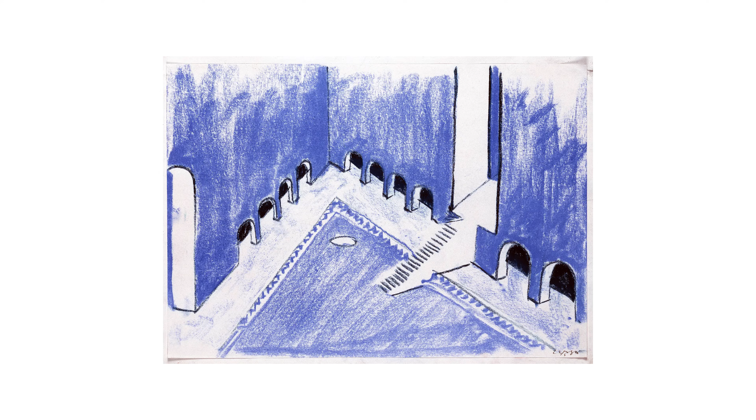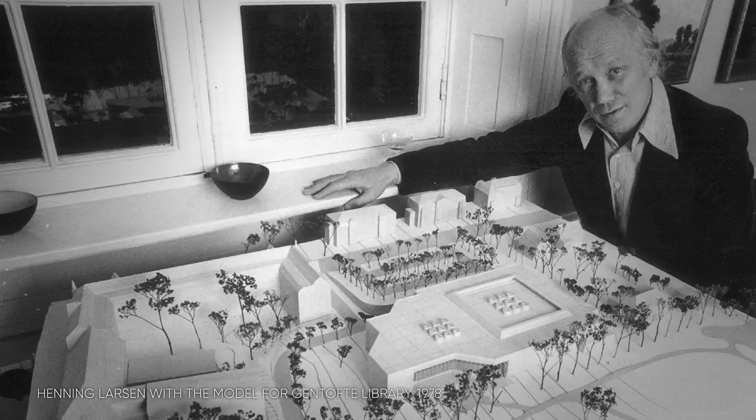So the practice started in '59. It was Professor Henning Larsen who started the practice. But in '79, the studio did the competition for the Ministry of Foreign Affairs in Saudi Arabia and won that competition, and that became the big breaking point for what's happening here. And I started in '89, and at that time the studio just completed and finished the Saudi Arabian project, but also a number of other projects internationally. So it was really, at the time, maybe the only really international studio besides Jørn Utzon here.

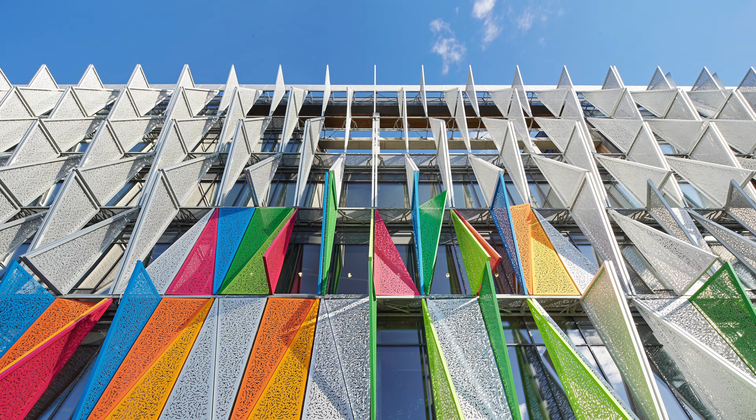Already before Henning Larsen passed away, while he was still active in the studio, we started a journey of moving into sustainability more deliberately and also in depth. We started with energy consumption in buildings, which is a big topic in Denmark because the cost of it is very high, since it's much colder here than in the south. And that journey had already started.

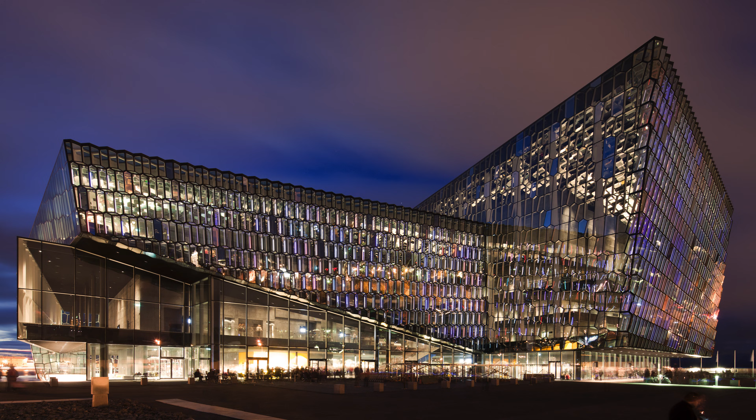Henning Larsen, you could say, was doing a transition of the studio to a group of partners over some years before. So when he passed away, it was not like we lost our father per se, but he was a very important person. At the time, we had the keys to the car, so to speak. His vision of what an architectural studio should be, what this is about, what the whole profession is about, is still very strong and very much alive.

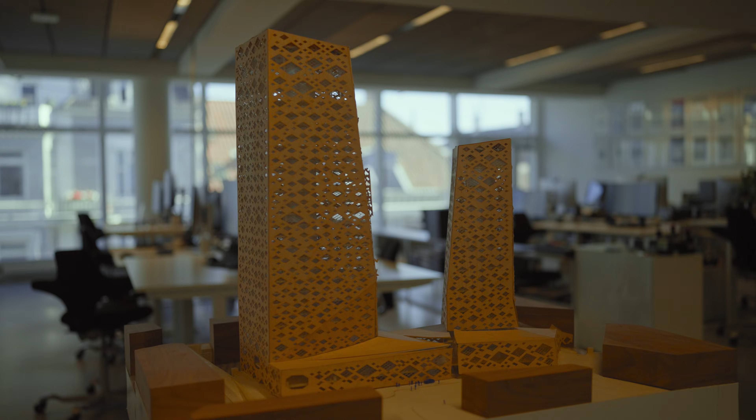We never, ever repeated ourselves. We had clients calling us, saying, I would like a building like the one we have seen. And we said, sorry, we don't do that. We never do two buildings alike. So the curiosity and the openness and the invitation to younger generations to come in and be part of, let's say, coloring or looking at the future is something that's been everlasting in our legacy. Hopefully this is still happening here.

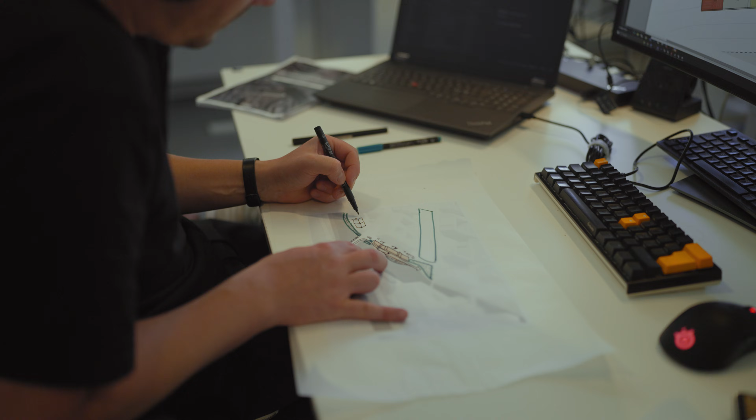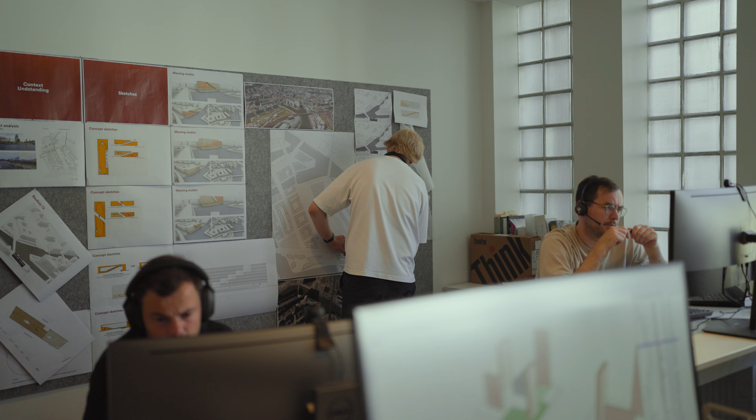I think it is. If you look at our staff and the good architects and colleagues, the average age is something around 30. So we have quite a young, big group of people doing it. And I think for us, part of being curious is also that you are young and want to learn and stuff like that. But of course, in combination with more experienced people.

In Henning Larsen, the context, the place, is the whole driver of what we do. In a technical perspective, in a climate perspective, in a people perspective, and society perspective. That's the foundation, so we use a lot of time in each project to do a deep dive survey of what we're trying to work with.

The learnings from Bolzano and the inspiration of Bolzano was very much to understand this doubleness between the Italian part and the German part, the industrial part, the old part of Bolzano. The Quartiere Ponte Roma project is located in Bolzano, surrounded by beautiful Italian Alps in a beautiful city.

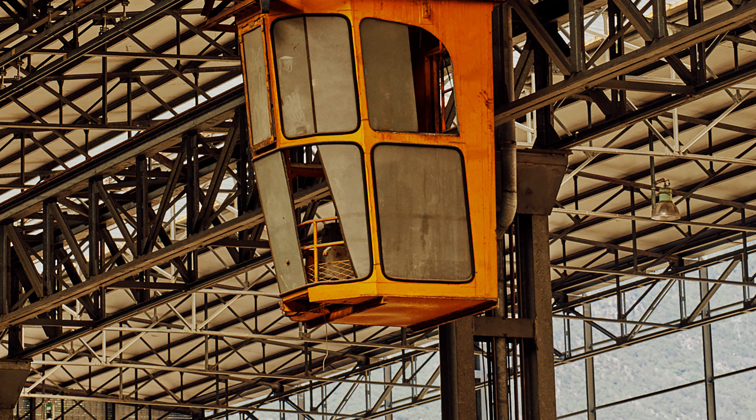When we first came to the area, as always when you're coming to those former industrial sites, you just fell in love with the scale of that and the kind of monumentality. When you start to dive in and read about the history, you also feel that those buildings are there, and of course you want to keep them for many reasons. The first one is the memory and the kind of nostalgia. It's also the CO2 footprint. And also the third one, purely architectural aesthetics - we like those structures.

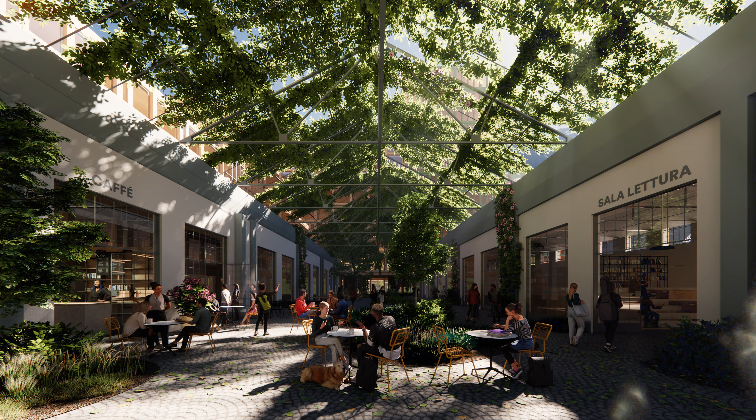What we really tried to do was to not completely erase this authenticity of the site, where you see industry and machines and it's a little bit dirty, but rather maintain it as much as we could and really embody it in the design. But at the same time bring some of the DNA of the Bolzano city center that people love so much. And because the structures are already there, they're easy to activate, and the state of the two ones that we kept was really good. We put them at the focus and the central pivotal point of the whole master plan, relating with the public space as well and using them as a public space.

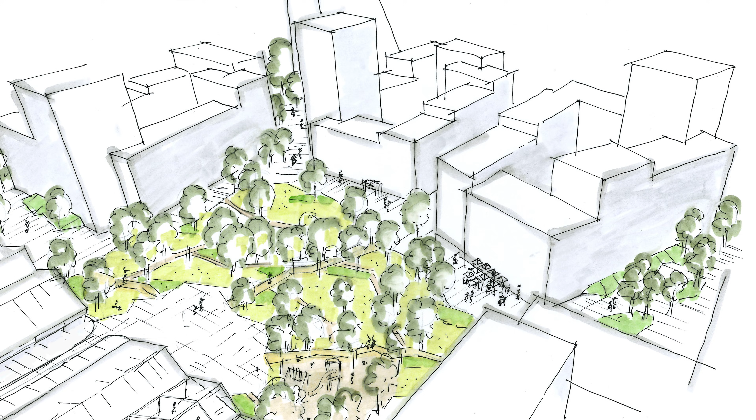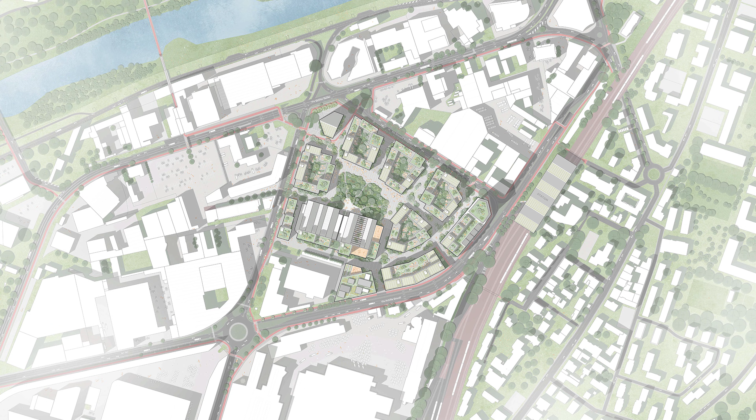The first thing we did when we looked at the site and saw there were 7 existing industries was to really scan and understand what could be valuable in these halls and what could be maintained. Two of the halls we found had a lot of charm and poetry, and they're the most ancient of the site. They're quite special because they're exactly identical and almost kissing each other, so we were calling them kissing halls for the whole design project.

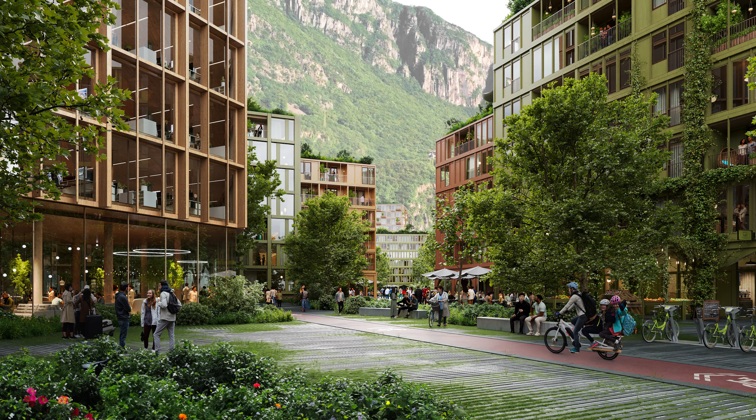But also, what to do with the other 5 halls that we cannot maintain? This was on a smaller scale, so we looked at their architectural elements and tried to figure out how we could reuse them in other ways. For example, some steel beams were used in the roofs of some of our buildings to create greenhouses.

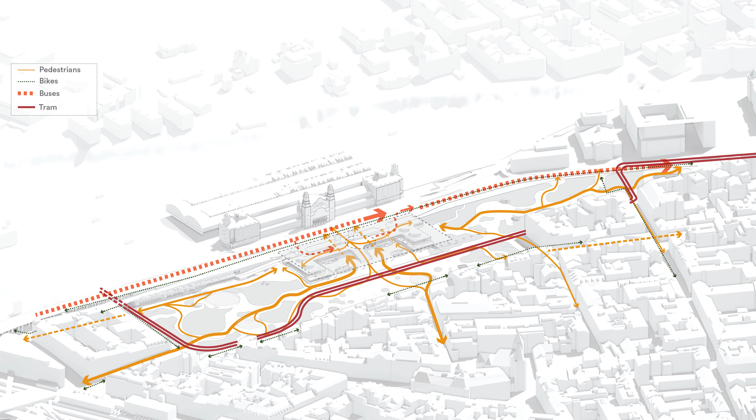When we started working on the Prague Central Station, that was an interesting way of thinking, because you have this hub that connects not just a train, it's a train station, but it's a true gateway to the city. You have buses, trams, soft mobility, cars, where all people are arriving. So the whole concept was about how to make an easy and understandable interweaving of all those ways of mobility.

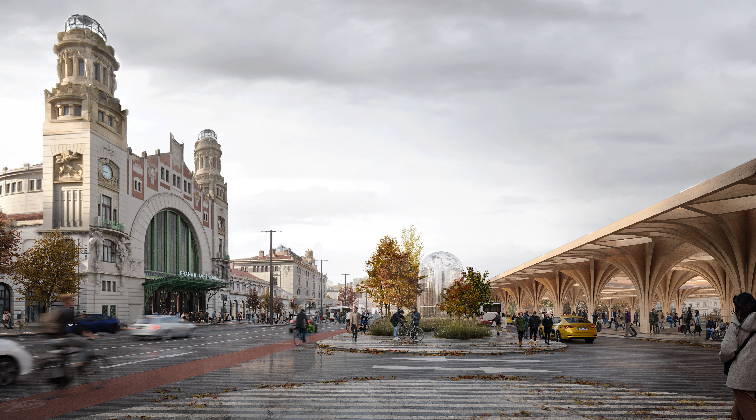We planned for a positive impact on the everyday life of people by developing three strategies. We focused on safety, mobility, and heritage according to that site. We've been looking into making this a safe place for people during the day and during night. Our landscape team worked in the park, creating visibility and sight lines throughout the park, and we also integrated a light concept.

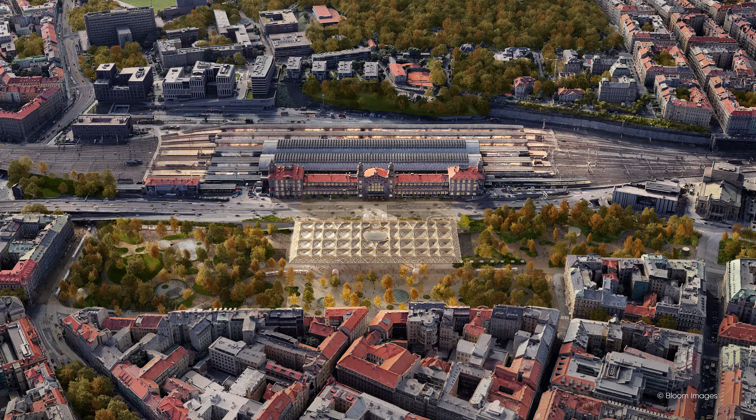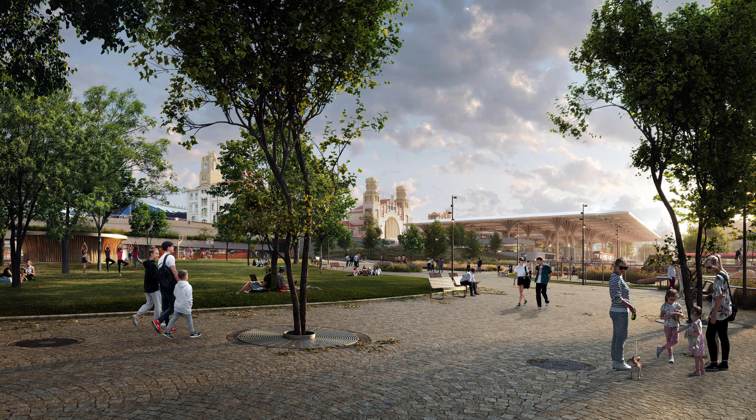When it came to working with heritage, we had a big emphasis on trying to keep as much as we could of the existing park and terminal hall, but still transforming it into a future-oriented mobility hub where there comes a fast train, a new metro, and a new tram line. We also worked with a new layer, like a new canopy reaching out into the park, which was inspired by the treetops of the park itself, to make a holistic proposal.

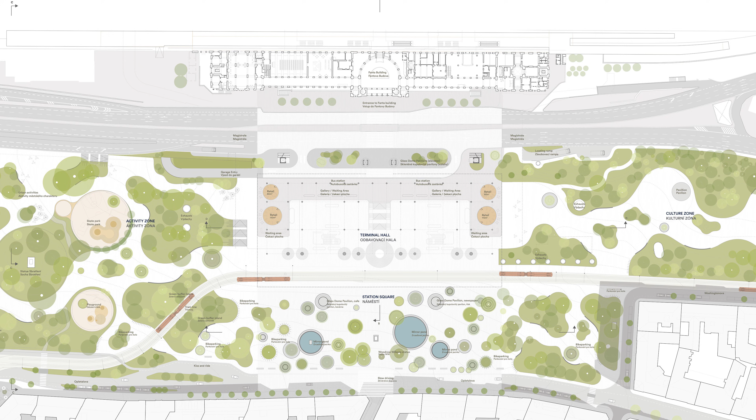The way we work in the office is to understand not just the urban scale or just architectural or just landscape, but we try to work across those three subjects. This project is an interesting example of all three things coming together and informing each other—the landscape is informed by the design of the train station and vice versa. How we think about urban fabric is also even larger: how you enter into the city, what is your experience arriving, and what message you want to give to people coming into the town and when they're leaving it.

For the last years, we've been obsessed with the carbon footprint of each material, which is the big thing. But also that we are using genuine materials. So when we use wood, we try to use it as wood, not as something else, not wood made in plastic or wood that's painted. Personally, I'm so obsessed with this that there's a longevity in quality. If you really do quality, it lasts for many, many years.

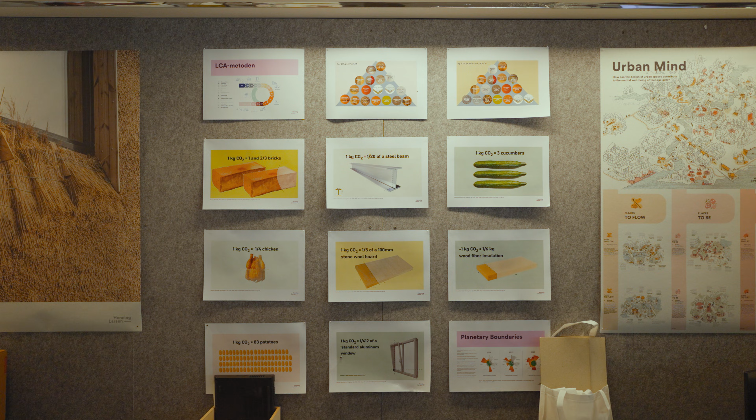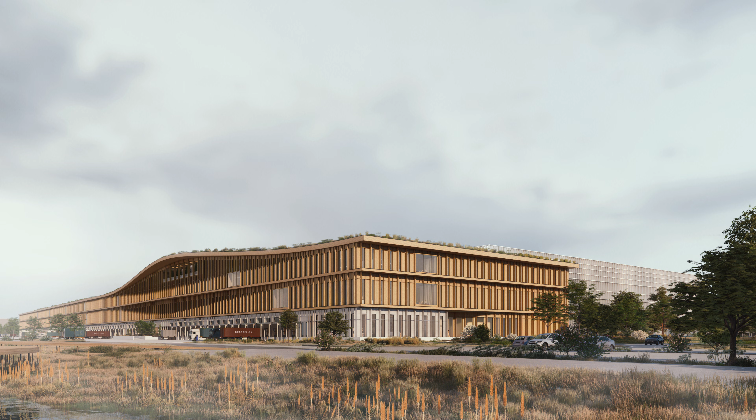Trying to look at the carbon first. How can we bring it down? Where can we get it to? If you look at some of the things we have in the studio now, with the walls of hay, that was a small test project we did in Jutland, 200 kilometers from Copenhagen. 250 square meters, very small, not a significant project. That project has now generated an enormous project in Holland, more than 100,000 square meters of transport hub, a logistics center basically, building the walls in straw. And that is to really bring down the carbon footprint.

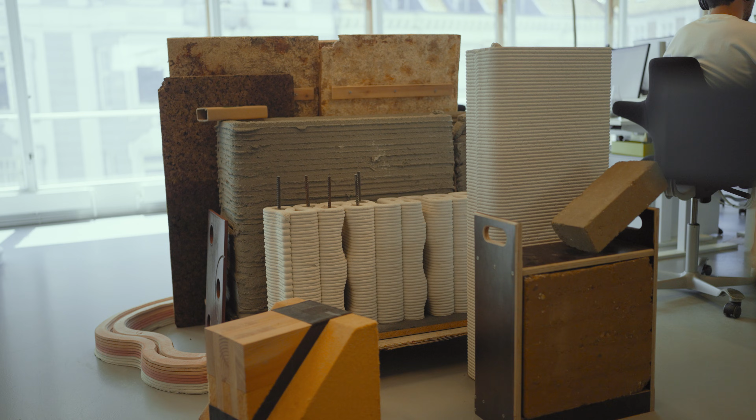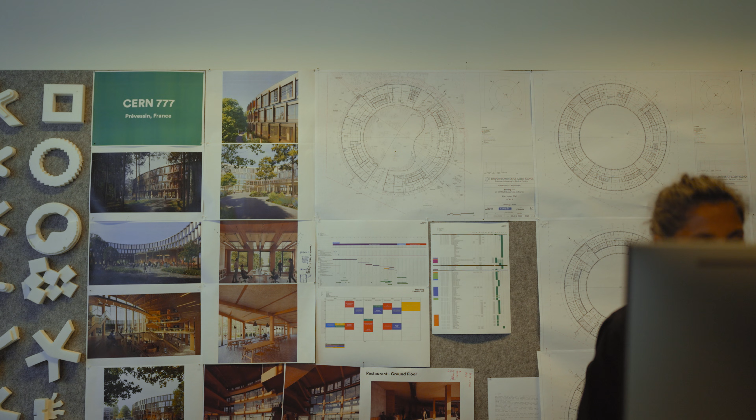So concerning the CERN building, we're following up on our obsession to do wooden buildings. We were very lucky to be invited to an international competition. There were actually 20 competitors, which is a lot. Of course, you need to find the right concept. At CERN everything is about circles, and it's evident you can do a concept which is circular, of course. And we did, and we won.

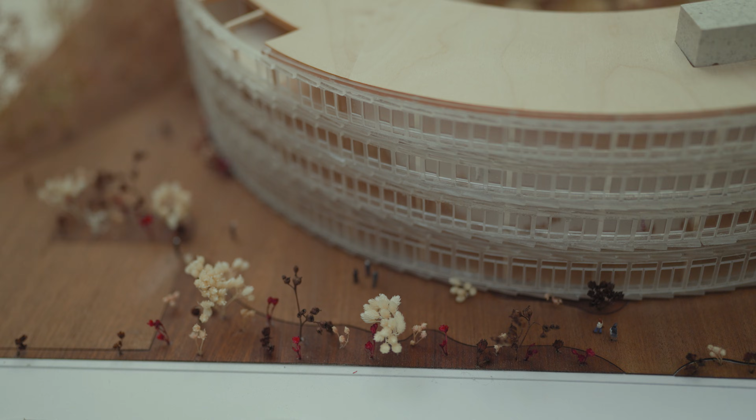What's interesting about the building is that it's taking a step even further towards the perfect wooden structure and the perfect low carbon structure, because it's a big game to find the right balance between materials and structure.

It's a building where we've gone all the way with a full wood building, everything in wood - all slabs, columns and facades, everything is wood. That was a strong focus when we did it, but also inspired by the wood cabins in Switzerland, in the mountains. So it wasn't something far off, we didn't look at the Nordics, it was really a Swiss character.

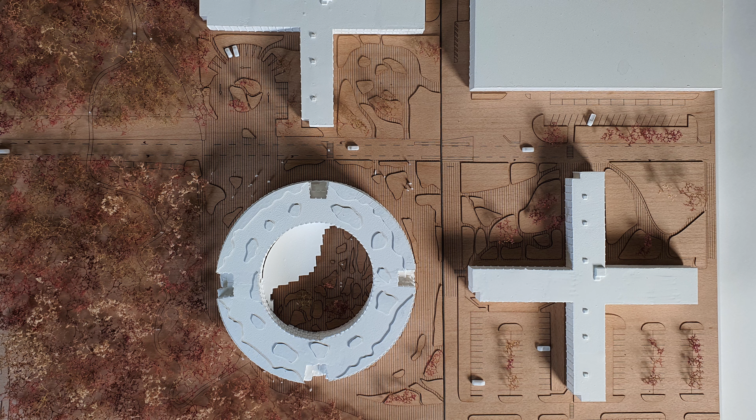So it's basically like a donut with a lot of small office spaces. There's a lot of researchers that need their little space, all of them. 3 floors of office and a lower floor with a restaurant and some kind of labs also.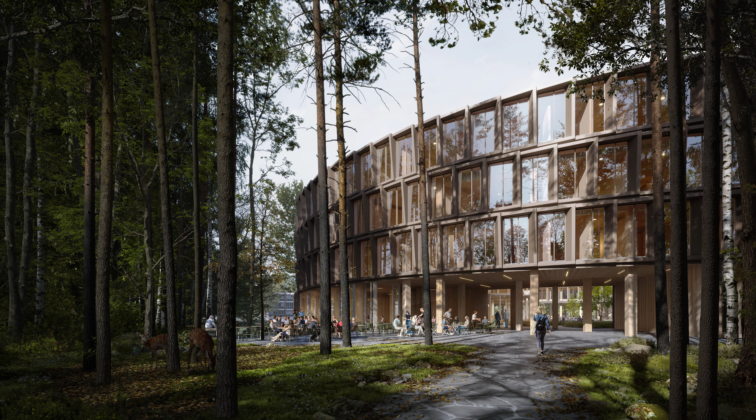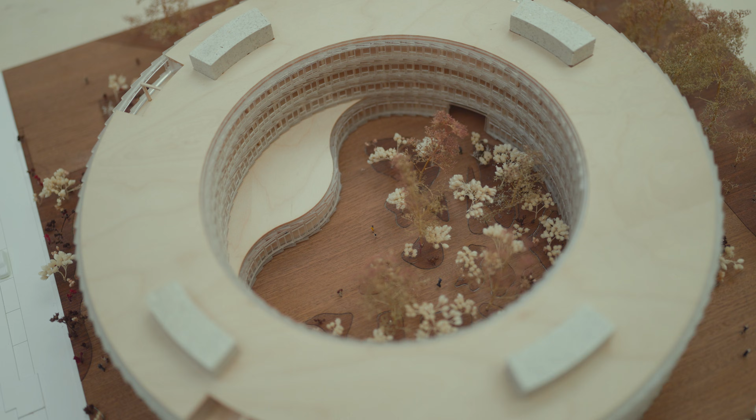At CERN, we were extremely fascinated by Geneva, the Alps, the lake - it's beautiful down there. So the biophilic approach, taking in and making nature part of the building, having a complementary thinking about building, culture and nature - that's the basis of CERN. So the building is part of the site, part of the nature, part of the mountains, and it's also a passage you go through into the courtyard, which is protected, full of trees, with rocks from the Alps in the courtyard. So it's very much about a kind of metamorphosis between nature and building.

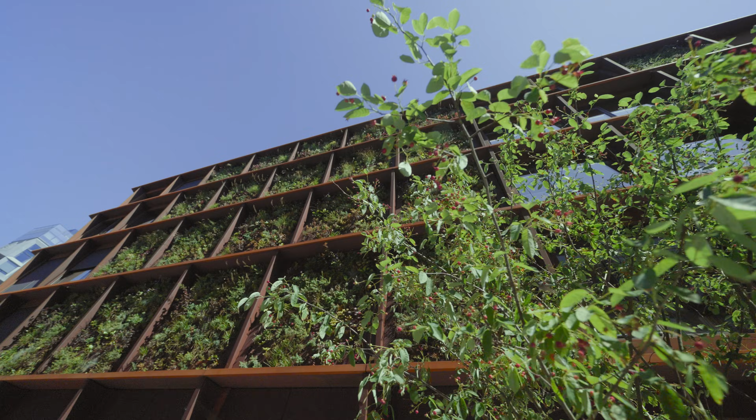This is the green facade. This one is about how we could cover as much as possible of this facade for the residential living here and then have something nice to look at - everything you see from your bedroom and stuff like that, this is the green wall. And we got subsidized by the government because this is the first time it's a self-watering system, so there's no artificial water. Not like our balconies where we water every day - this is not like that.

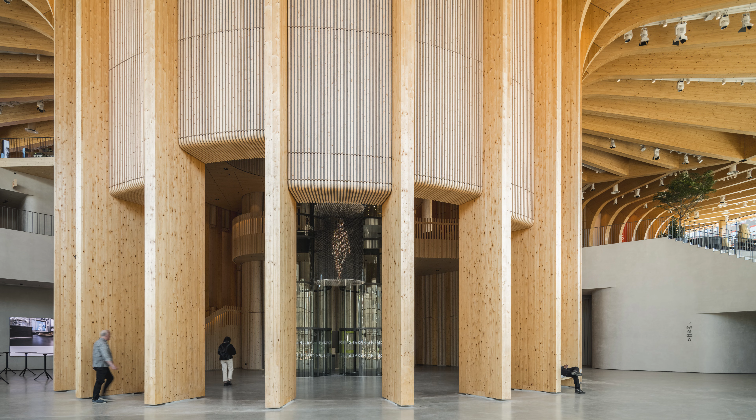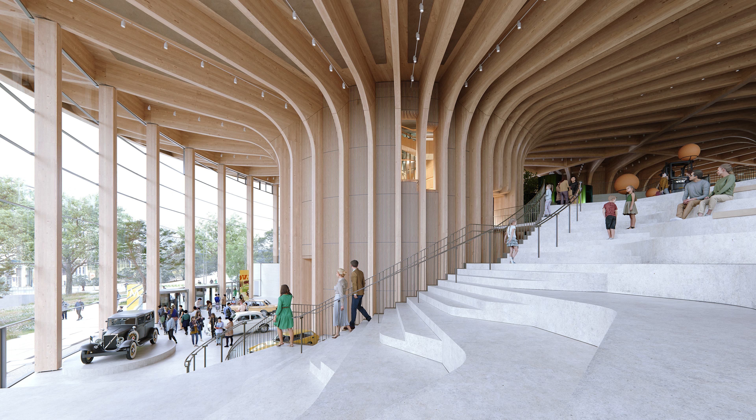Volvo was an incredible experience for us. We were trying to search for the very special thing about Sweden, about Volvo. When we did the competition, we had a long discussion about what is a Volvo and what is a Fiat, what is a Ferrari. Volvo is about two things only - it's about safety and it's about access to nature. That's the two things Volvo does. So we saw the possibility of speaking to the brand in a human-centric way of thinking, securing human beings and taking care.

For this building there would be 4 keywords: the icon, the meeting place, the premium experience - which comes from the car experience - and then the most sustainable building or expression.

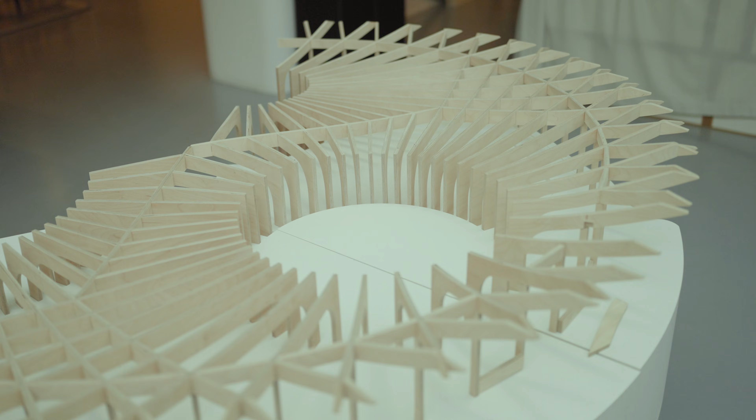So when we looked at it, we said, okay, how can we somehow represent this in a building? In a way the wood structure we ended up with, and also the round shape, was about this idea of being out in nature, looking up at these big trees and being protected by the crown of the tree. The safety is about that. So the wood came from this inspiration.

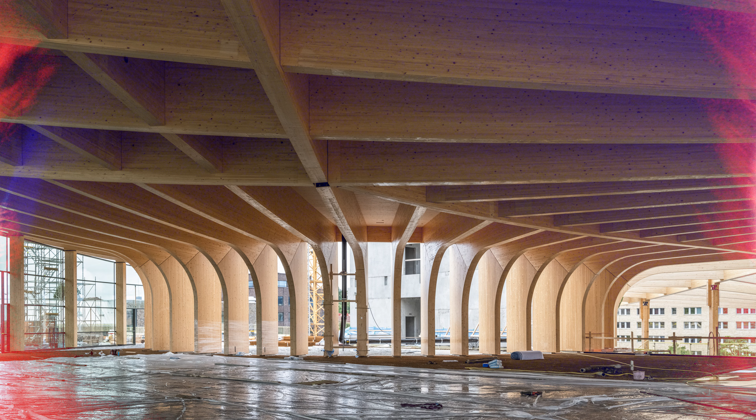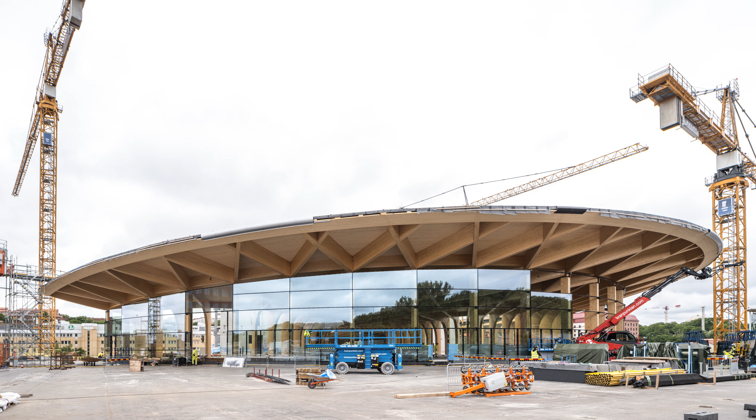It was important that this was a meeting place for the city. There we kind of had this idea of re-establishing a piece of nature inside the city.

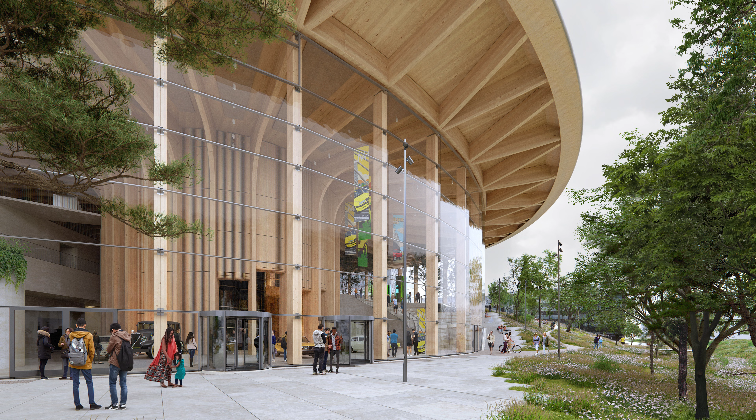We need to accommodate a lot of parkings, 800 I think. We took a little piece from Sweden and put it on top of the parking, so in this urban area we have a kind of big hill. That means you have a slanted landscape, it's a terraced landscape, a cascade.

On which different things happen. In that podium, you could call it, you've got all kinds of secondary functions. There's also the vehicle handover, there's a kind of event hall. Everything is kind of in the mountains, as we call it.

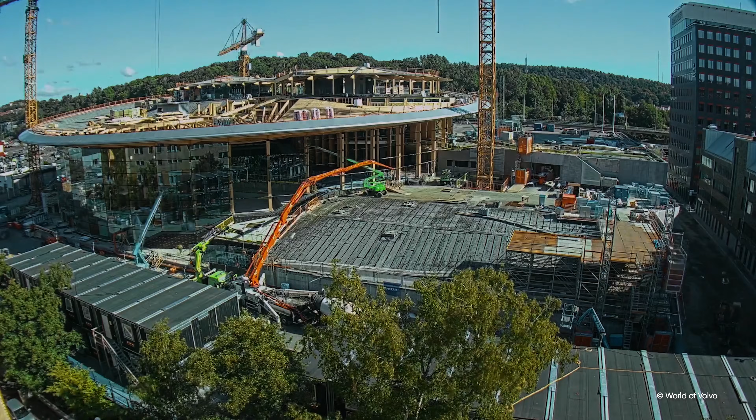And over that, or on that, you have the forest. The forest consists of three bigger trunks in wood. And from the three trunks, a wooden structure is woven into this bigger canopy in a big parametric game, which of course is extremely complicated.

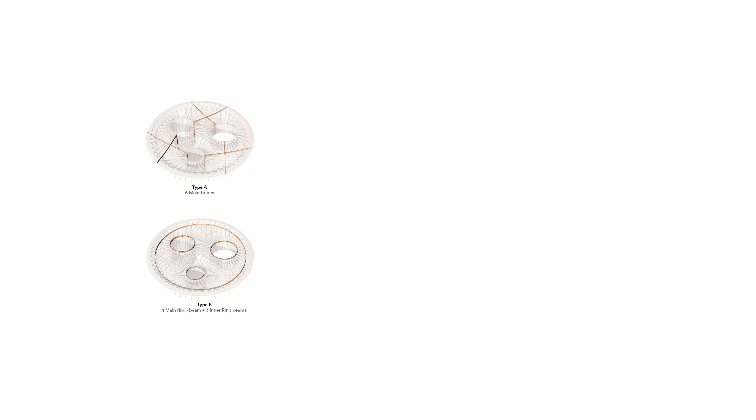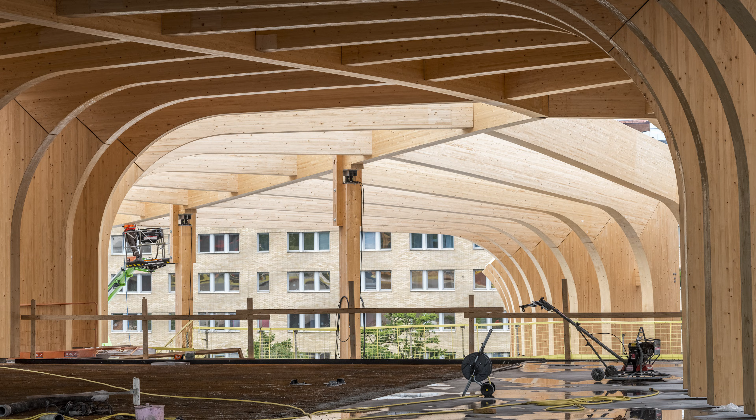If we didn't have the facilities with computerized design and computerized manufacturing, it would be nearly impossible to do. So a lot of different pieces need to be produced, numbered, and assembled. That was an amazing thing to see assembled, because this happened really, really fast.

For Copenhagen, it's the whole thing about - and unfortunately there's not enough international architects here - but the international atmosphere and this building up is that there was strong economic growth here, and the city also changed from just being the place you went to work and then went to the suburbs, to really living here. And then this plan of this area was made by COBE.

There was this strong wish to bring people to the water, which was again a political thing. 20 years ago, if you were swimming in the harbor, it was the direct way to the hospital because it was so polluted. But there was a decision taken politically saying we will be able to swim in our harbor, and it took 7 years to clean it.

And after that, you've been able to swim. And this is our most popular asset in Denmark at the moment.

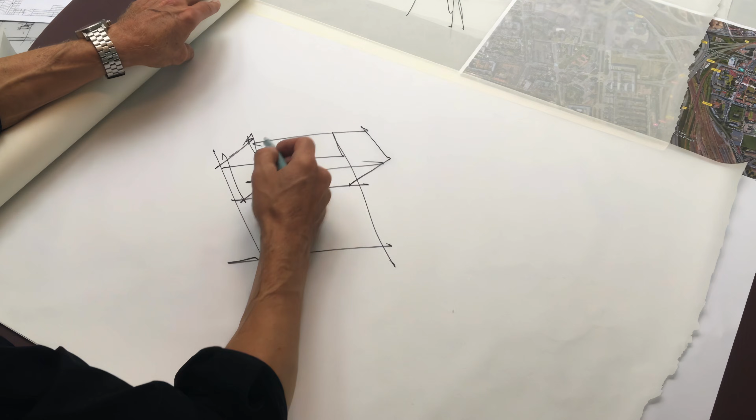And also having cut-out courtyards with terraces, with lushness and green, securing the best possible workspace for people in the building, being close to a terrace, being close to the green, and being really part of nature.

We have 266 trees on the building. We have 180 trees on the roof. We have put off extra facades to be shaded for the wind. And we have a lot of biodiversity in it - a lot of bees and birds and things that normally would not have a chance in this environment.

The overall geometry of the Biotope is breaking the linearity, the traditional linearity of the office building. The Biotope is part of Euralille, where a lot of new buildings were built in the 90s.

We needed to break down the traditional way of making workspace. The site is kind of a rectangle. We cut into this block and have a zigzag, you could also say a yin-yang - the idea that you meander the green and the building together.

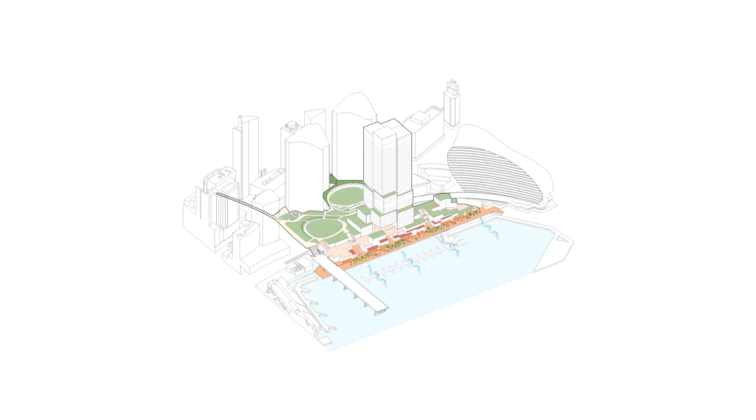The sketch was to say we'll do a very efficient machine for the tower, but we'll do that quite fast. And all the time we will spend on finding out how to connect to Sydney, to connect to the scale of the old harbour. The CBD, which is the business district, the centre of Sydney, is very mineral in its character. There's hardly any green. So could we introduce a park? Could we have places where you meet?

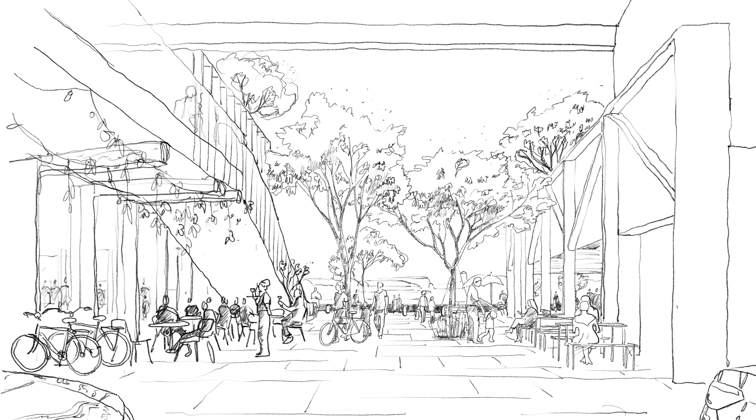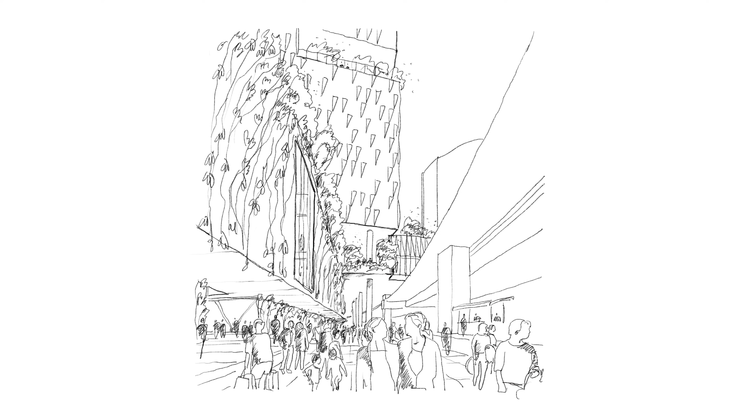I think this project in Sydney is a kind of example, also the way we try to push our projects. So when you start to work in this big scale destinations, you're always thinking, okay, how to bring that human scale. And again, coming back to Scandinavia, that's when, if you read Jan Gehl books, we have to focus on the human scale and well-being and how we kind of behave in those areas. And you have something contradictory. How to bring that kind of scale and feelingness of coziness or belonging to the place in the clash of big towers or big structures. I don't know if you go to New York, you kind of maybe missing that in between scale.

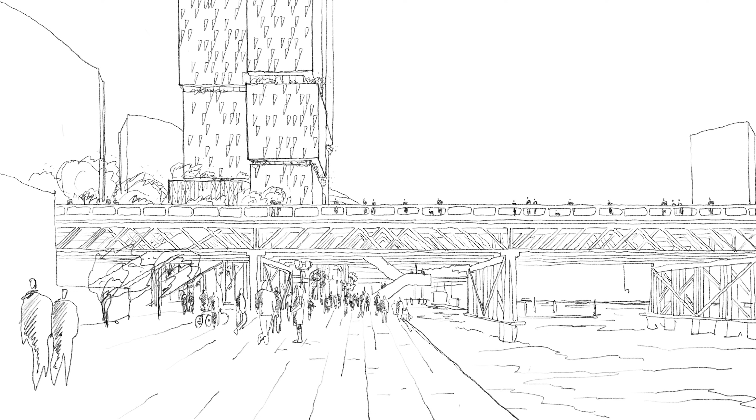Basically we sketched everything that was at city level, which is up to 4 or 5 floors. And that became these terraces and different streets and different levels and restaurants and stuff like that. So we wanted to connect this after work life that happens in Darling Harbour with the transition into the CBD across a big park with a permanent bridge as part of it. And then on top of that, have this big high-rise with the efficient floors.

I think that our most obvious ambition was that every building and every plan, because it was a master plan here, is that we are really reinforcing the public realm, that all buildings have an obligation to participate and be part of it. You cannot do a private thing. That's why also the bank buildings have shops or restaurants in the bottom, and it opens up basically, because otherwise we get this Copenhagen we had 20 years ago.

And I think it's not super unique for us. It's something that's been adopted, let's say, also in the planning. But this is super important. That's the first thing we test. If it really makes, let's say, makes a place. Are we doing enough to make this active, this place here?

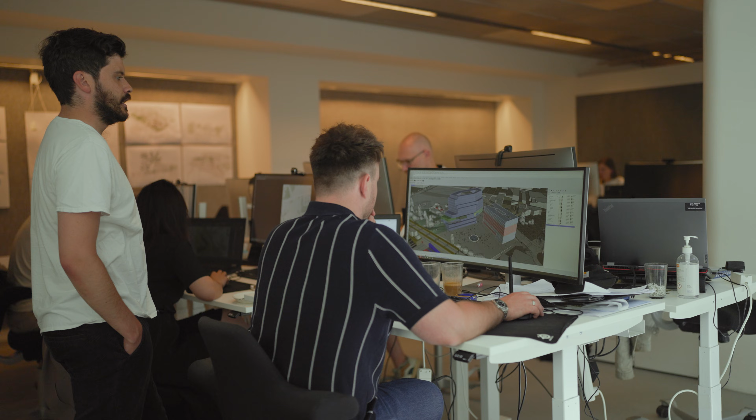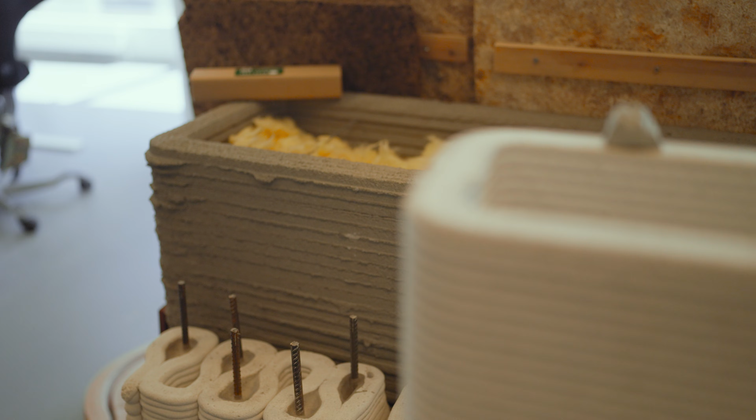How I see the future of architecture. I think we will see much more technology-driven possibilities that come out of digital tools or come out of manufacturing tools and stuff like that, which will change our perception of doing it. Like I'm pointing at our 3D printed buildings we're seeing behind, things we could not do before. Can create shapes that are almost impossible to do by hand. Things like that will be much bigger in the future. I think that's for sure.

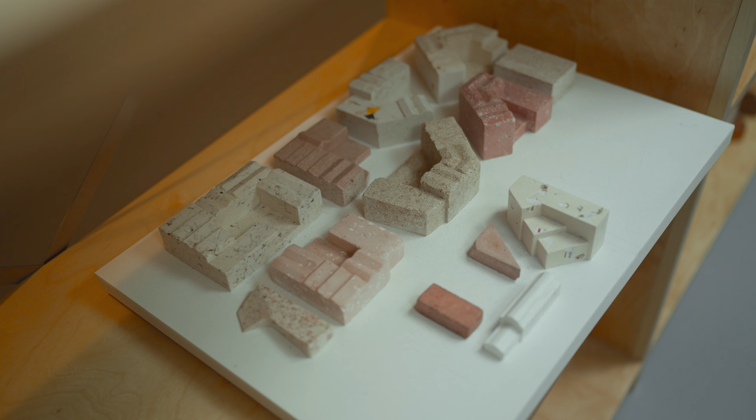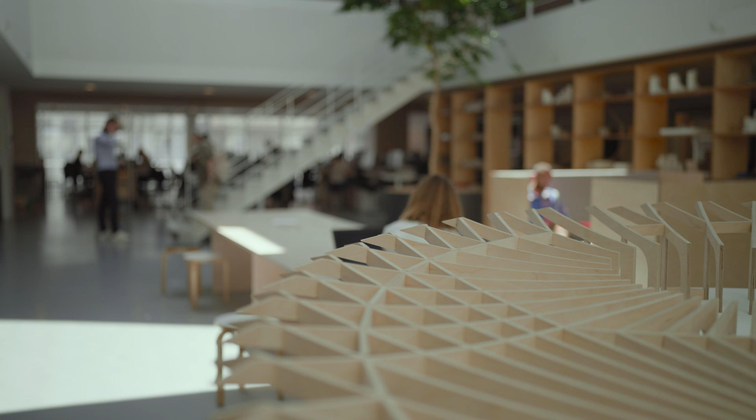But I think if a broader audience should understand it, we need to be able to tie it into history and legacy in a way. It's not a spaceship we are creating. We're creating something that comes out of a 1,000-year story of humanity. And we are just adding a few things on that, but we never forget our anchor in where it comes from. And that's why I think it's so important when you go to a place, you really try to understand it. And if you do that right, that'll be fueling your design process to look into the future.